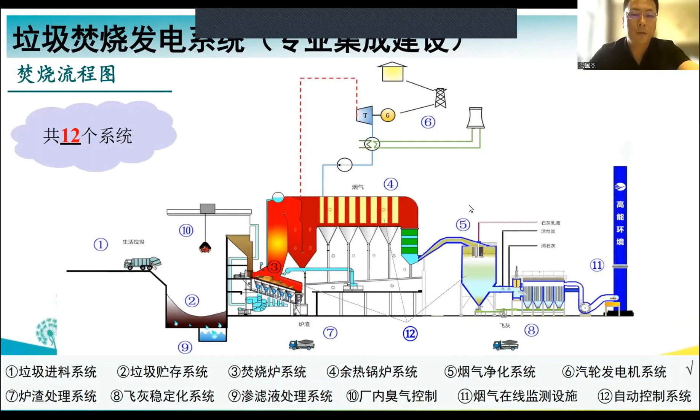This picture is a typical incineration plant for the waste, and the layout will be like this. So just now I talked about the 12 subsystems, and next I'm going to show you some specific pictures.

The first one, from the left part of the slide, is the feeding system. After we collect the waste from different areas in the city, we're going to put them in this area, and they will go to the waste storage system. This is the cabin to keep this storage.

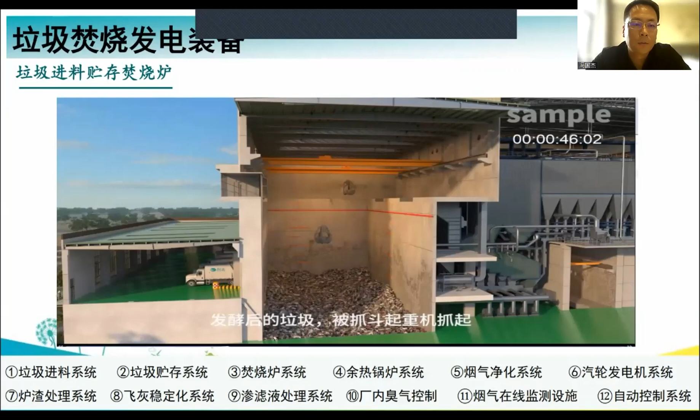Directly connected with this cabin is the furnace system. So when we go down, we can see the waste after burning, it will come to this step.

This is the cleaning system for the flue gas. Usually we use SNCR, the denitration, and the semi-drying and active charcoal and drying method, and use a bag collector. After all these steps, the flue gas will meet the national standards of emission, and it will not cause pollution to the environment.

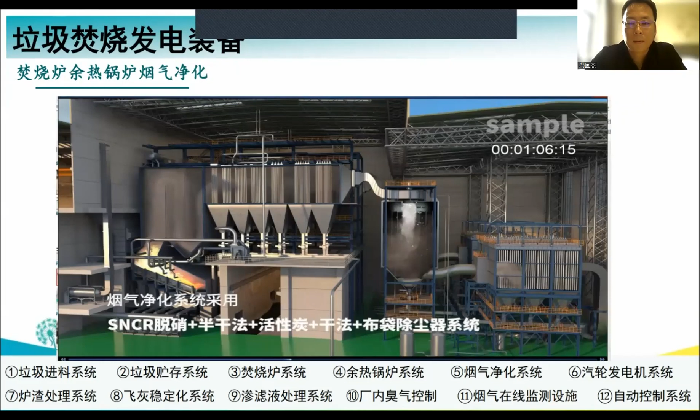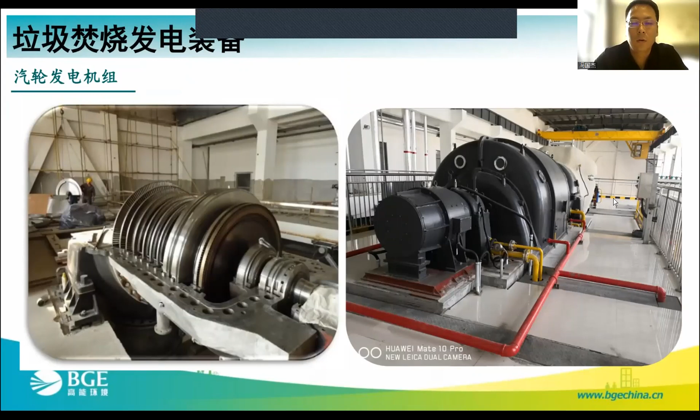While we are burning the waste, we have some thermal energy, and through a steam turbine generator we can convert them into electricity. This can be connected to the national grid.

In this project, we can have many different ways of collaboration. In China, the most popular models are these three. The first one is the PPP, which means the government and some private companies will be partners. This is very popular in China.

The second one is the BOT, to build, to operate, and to transfer. For example, after I build this project, I can run this project for 20 or 30 years, and after that, maybe I can transfer it to the government or to another operator.

The third method is build, own, and operate, which means I will always own this facility after I build it. It will be my asset, and I will operate it for a long time.

So for any potential project, we have to coordinate with the government, make sure we understand the whole region. We have to analyze every day how much waste is produced, how to connect to the grid, and how many people will be working there. So we must go through a lot of assessment.

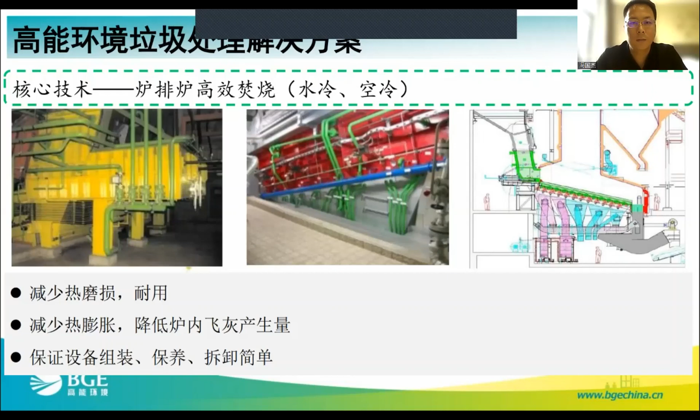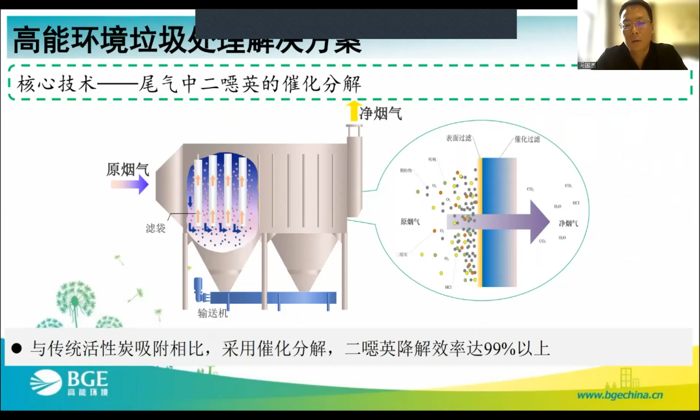We also have our catalyst for the decomposition of dioxins, so we can decompose dioxins by 99% and above.

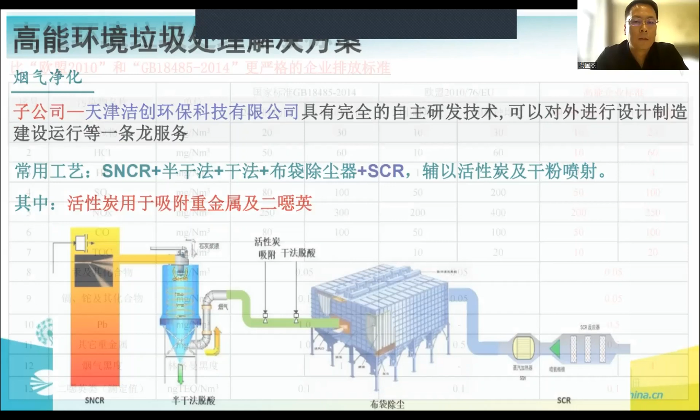We also have our subsidiary called Tianjin Jiechuang. It has self-developed technology and provides an all-in-one solution.

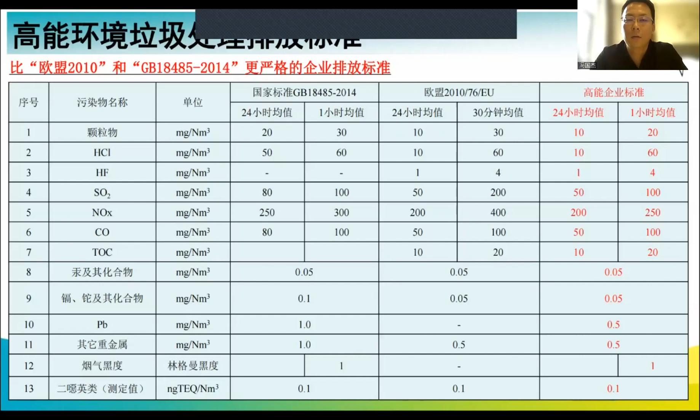As you can see, this is the emission standard of our company. We currently strictly follow the national policy, which is also much higher than the European 2010 and other related policies. Now I'll share some case studies with you.

These are quite classic cases of waste-to-energy. This is in Shunyi of Beijing. It was not built by our company, but it is currently under our management, and we are responsible for its daily operation.

This is in Sihong, Jiangsu province, in the Yangtze River Delta Economic Zone. It is also one of the important national projects, and we could deal with over 400 tons per day.

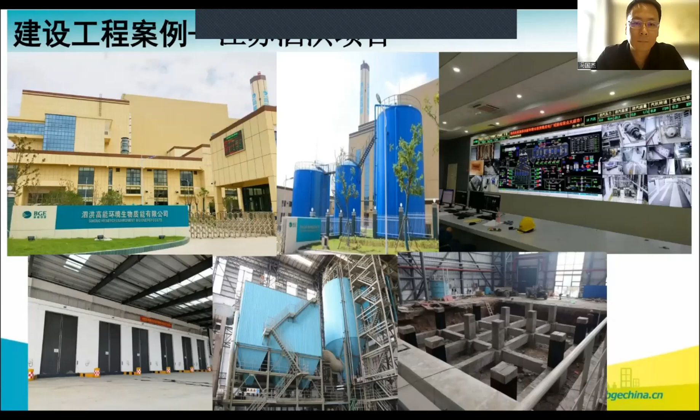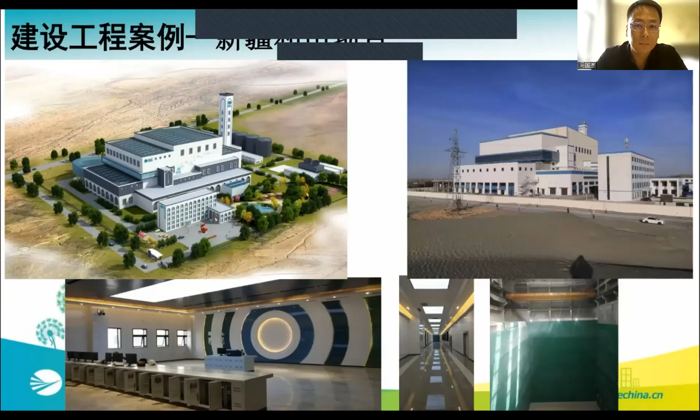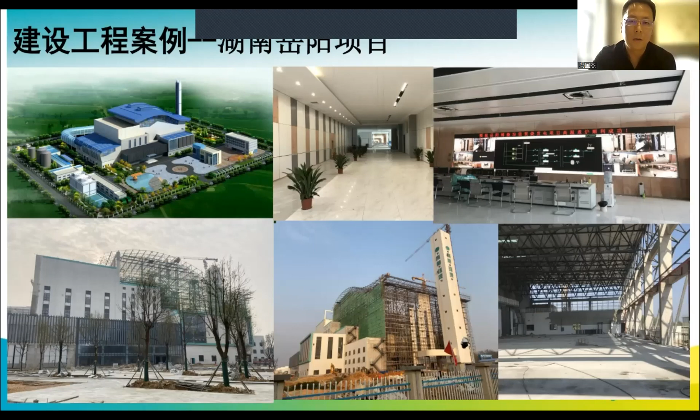Currently, this case shows the strongest operation capacity of our company. We could deal with 1,500 tons and above, and it could handle kitchen waste and sludge.

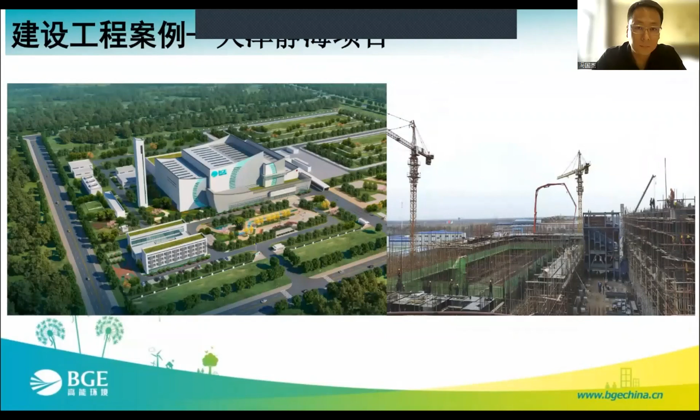This is for the 2+26 corridor project. This is in Neijiang, Sichuan province.

This is one of the biggest waste-to-energy projects of our company. We collect the waste and transport it, and we also have the terminal for the all-in-one solution. That's all for my sharing. Thank you for your listening.